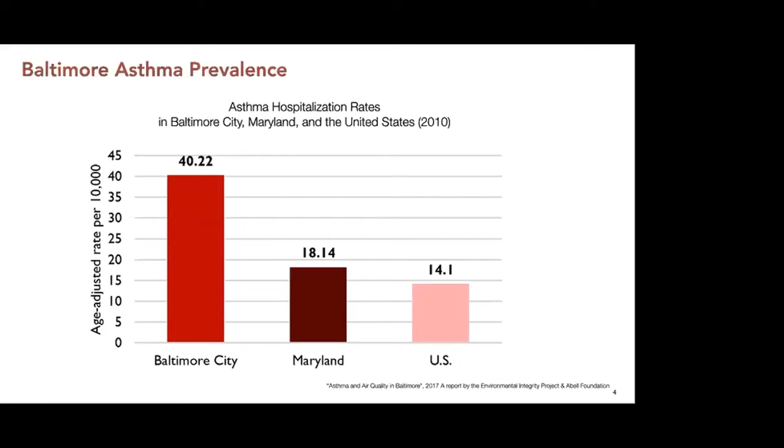It is no wonder that for Baltimoreans involved with affordable housing and community development, the mention of asthma would be attention-grabbing. A study done by the Environmental Integrity Project and Abell Foundation found that Baltimore has 3 times the national rate of asthma hospitalization and twice the rate of the state of Maryland.

The same report had a few spatial analyses that I think is quite informative for us. On the screen on the left, we see the toxic air risk map, taken I believe from the EPA's EJ Screen information system. On the right, we see asthma hospitalization rates, which give you a metric of how bad asthma is in certain neighborhoods.

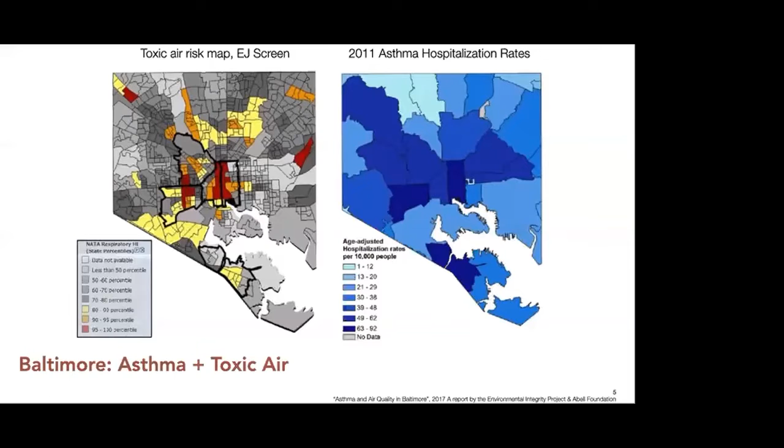There's certainly a correlation between the red areas on the left and the dark blue areas on the right, indicating that high toxic air goes with high asthma rates.

Mapping PM 2.5 particulate matter from traffic shows concentrations also coinciding with asthma hospitalization rates on the right.

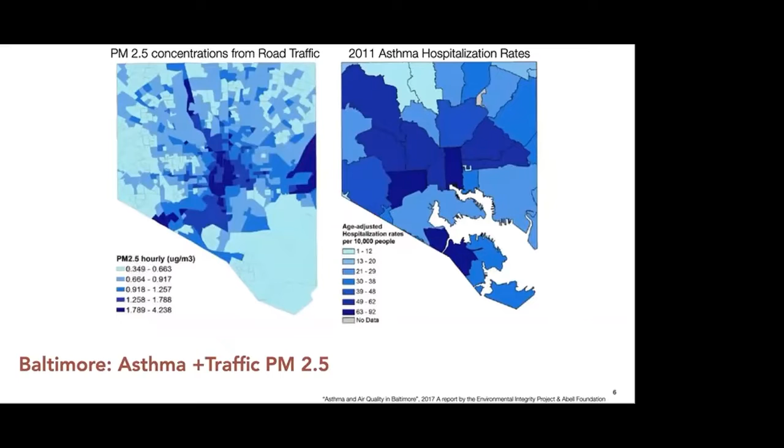In this slide, asthma prevalence is on the left, median income is on the right. Median income was found to have a strong correlation with asthma hospitalization. The low-income communities who have the worst living conditions in the city, and in Baltimore these communities are predominantly African-American, are clearly who suffer the most from asthma. In Baltimore City, the hospitalization rate for asthma was approximately 2.9 times higher for Black residents compared to white residents.

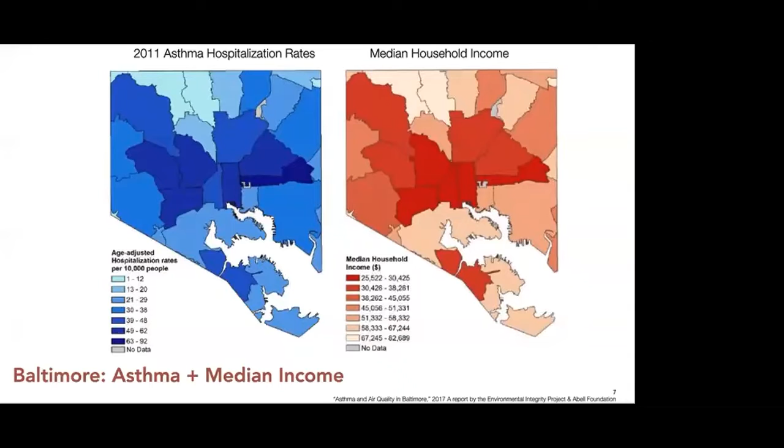So how can passive house design help?

But in order to go beyond anecdote, hunch, and conjecture to evidence and substantiated claim, we need a grounding in research and science, as well as studies of passive house buildings and their health impacts on residents. Has there been any research or investigation that could help substantiate such a claim? What area of health could passive house play a critical role in, and how?

Looking at various studies related to this area of concern, I found a study that compares the indoor air quality of two passive homes in London in 2012 and compared it with non-passive homes nearby. Temperature, humidity, CO2 levels, etc. were measured, as well as particulate matter. A cool part of this study was that resident habits were studied in detail—window opening, clothes drying, taking showers. In the diagram shown, for a month of one of the buildings, the cause of the spikes in humidity and hot water were thus identified very clearly.

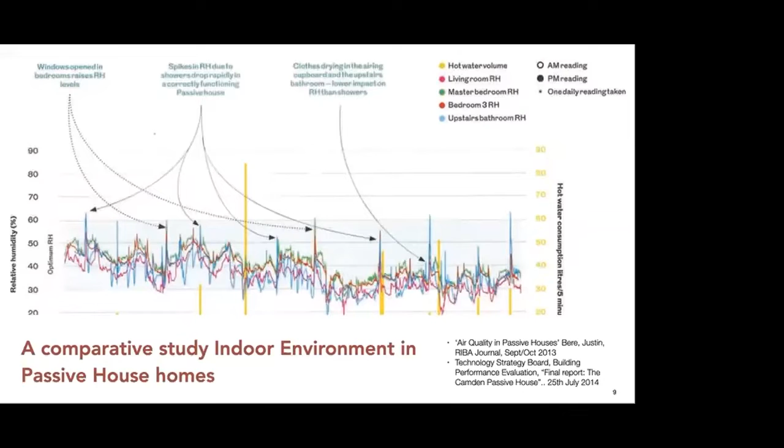Of the few studies of passive house homes and resident well-being, a focus I found was on verifying that a dependency on heat recovery ventilation provided a good, healthy environment. The two studies I found confirmed this using subjective evaluations of the well-being of residents. No studies that I found actually examined the well-being of asthmatic residents in passive homes, interestingly enough.

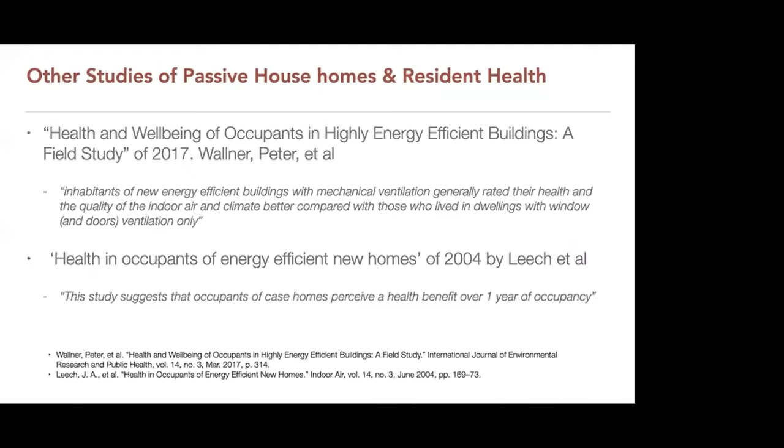Two studies that overtly went about constructing indoor environments to help asthmatic residents came across my research. One we will hear from Tom Phillips is the Breathe Easy project in Seattle. And a few years before that, a study in the UK where homes of asthmatic children were fitted with heat recovery ventilation, where symptoms were then found to be reduced. I hope I have the dates correct there, but in any case, Tom will set me straight in a few minutes.

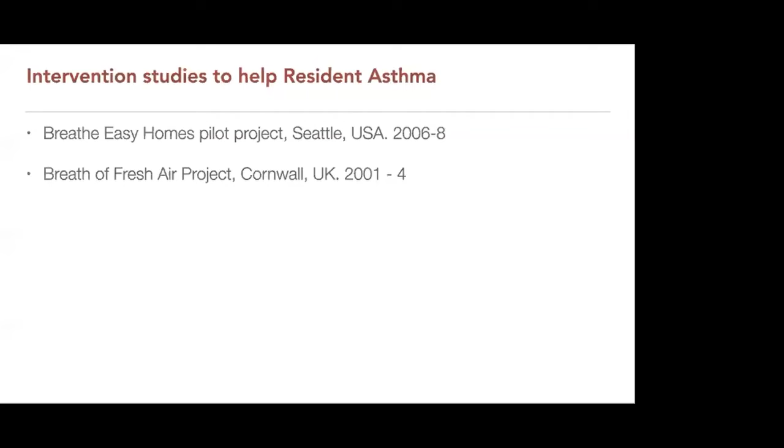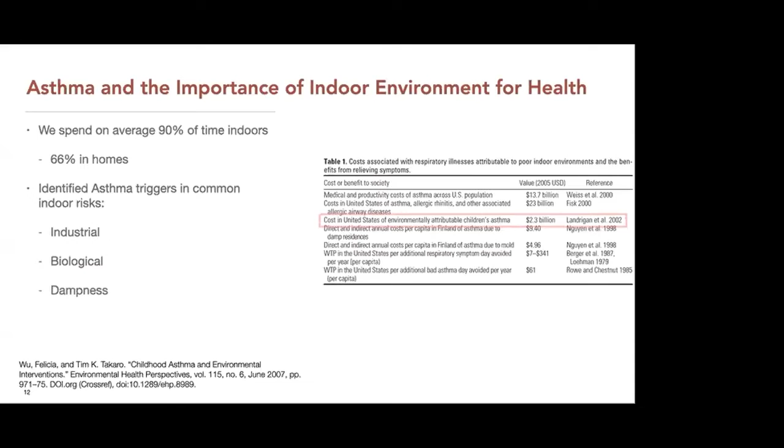There are many studies investigating connections between the environment and asthma in general. In a paper on childhood asthma and environmental interventions, authors Wu and Takaro point out that we spend 90% of our time indoors, 66% of which is at home. In the indoor environment, they identify health-critical contaminants, both biological and industrial, as well as dampness, that can trigger asthma. The cost of care of environmentally attributable child asthma throughout the country stood at an amazing $2.3 billion, I believe in 2005 dollar values, and presumably is much higher today.

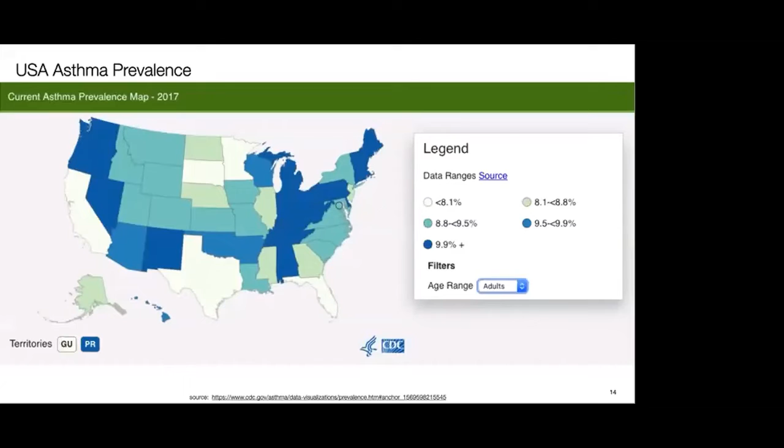So what are the basic facts of asthma that we might need to know? Asthma is a problem with our respiratory function. It's non-communicable, but at the same time it's not curable. The breathing pathways are constricted by reflex or allergic reaction. We have no control over the kinds of smooth muscles wrapping around our breathing airways, and they will contract by reflex and constrict breathing for an asthmatic person. Allergic reactions can also inflame the inner parts of the airways, and a similar constricting action can take place.

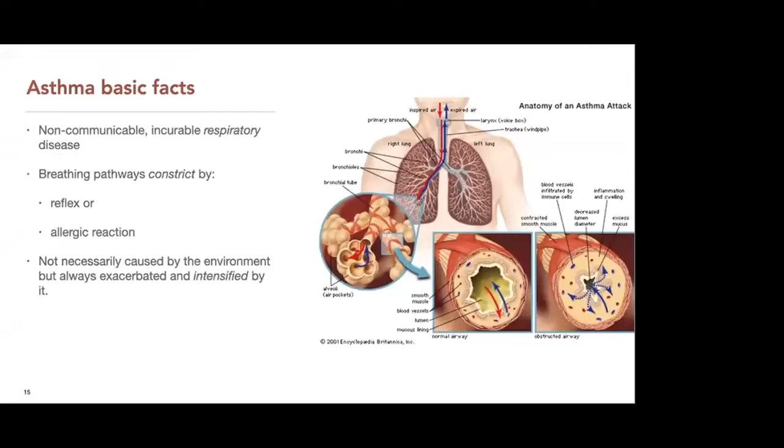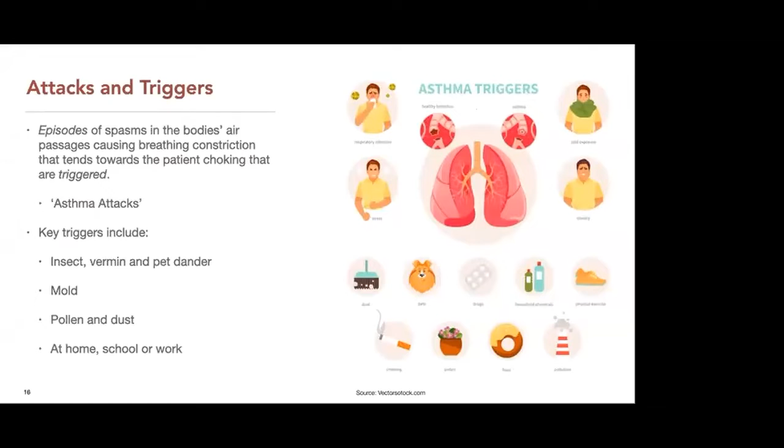Note that bad environments actually do not cause asthma. The environment provides triggers that keep asthma episodes recurring. Triggers to asthma at home are many, as mentioned earlier, of industrial and biological origin, and like cigarette smoke, even introduced by residents themselves. So a wide range of environmental parameters would need to be tracked to evaluate its impact on asthma.

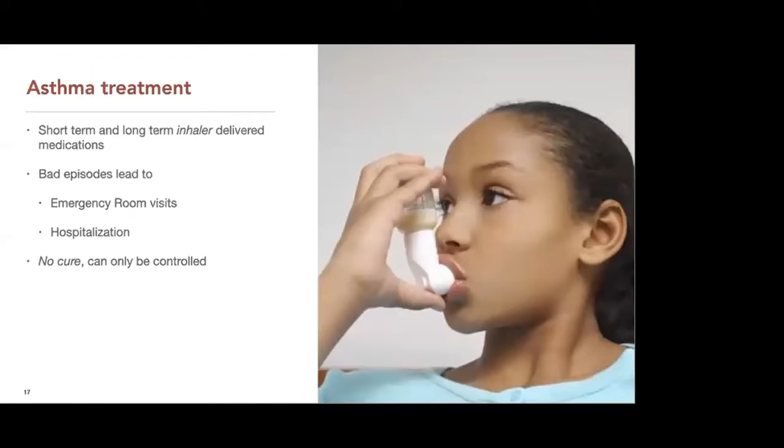Medication basically tries to relax those breathing airways we saw earlier that have contracted and constrict breathing. Severe asthmatics need to carry inhalers. Failing that in time, or overwhelmed by triggers in a bad episode, emergency room visits and hospitalization become inevitable.

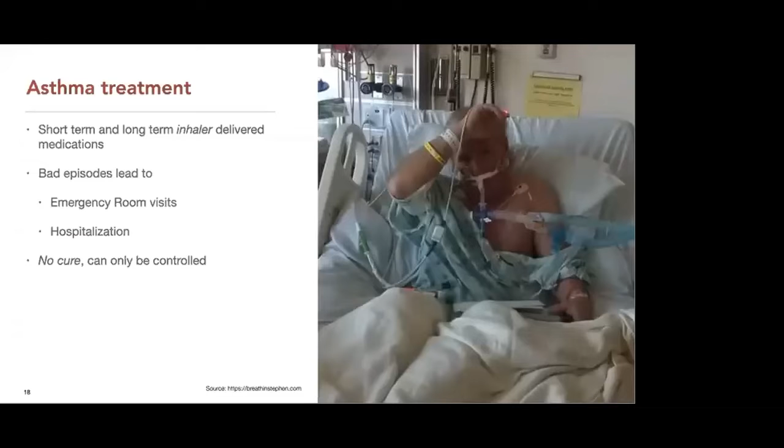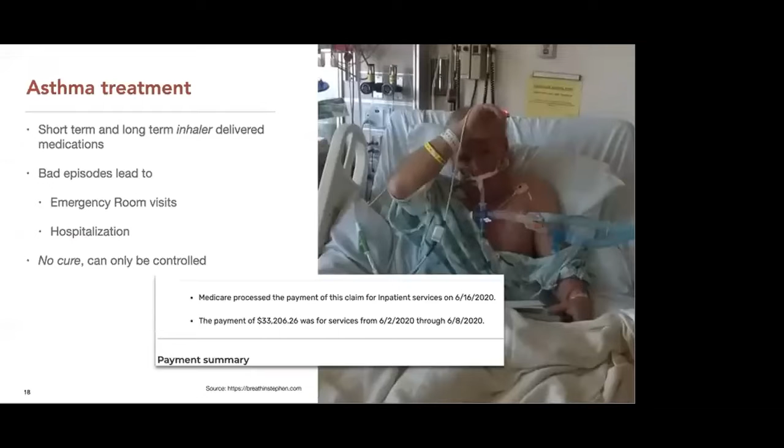Breathing Stephen, whom we see here, was born severely asthmatic, but is actually a marathon runner and keeps a fascinating blog where he posts his medical bills, which happen to be covered by Medicare, but run in the tens of thousands of dollars. Enough, certainly, to probably fit a good part of his house with PHI-certified triple glazed windows.

Looking back at Baltimore to get an idea of the impact of asthma in the city that Passive House might be able to help with. In this diagram, we are seeing in gray the whole city's asthma prevalence over 13 years, and in the two colors are two neighborhoods, Curtis Bay and Brooklyn. You'll see that the city's line is within a fairly narrow range, while the neighborhoods go up and down quite a lot.

Between 2009 and 2010, new control measures were applied to nearby coal-fired power plants that shaved off something like 45,000 tons of sulfur oxide emissions, 10,000 tons of nitrogen oxide emissions, and about 1,000 tons of PM10 emissions. I don't have any numbers for the PM2.5 emissions that would also probably be accompanying these pollutants. As soon as the air pollution was removed, you can see where the dotted lines are—asthma incidents in Curtis Bay and Brooklyn dropped.

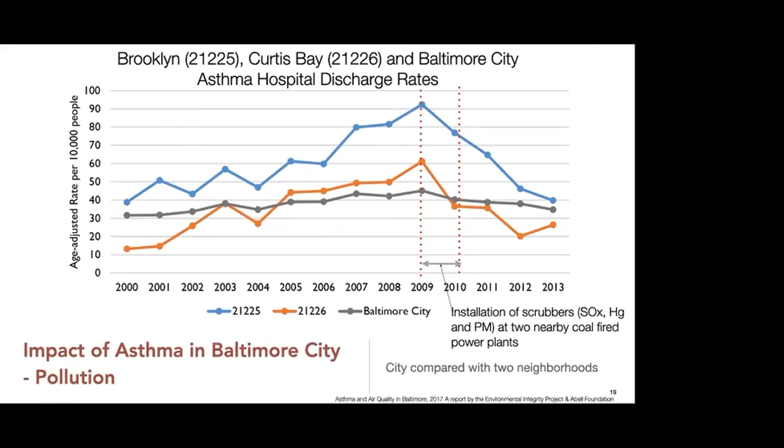These neighborhoods, few homes, if any, would be able to mitigate that kind of air pollution. And even Passive Homes, with their air filtration and balanced ventilation, would be able to deal with some, not necessarily all. We might have to find some new tricks to get Passive House to deal with some of the air pollutants, but we can, because of the mechanical systems that we use.

Okay, so finally, I'd like to take a look at also the impacts in terms of cost. One of the main factors driving high asthma hospitalization and emergency room rates in Baltimore is poverty, linked to many conditions that worsen asthma, such as poor housing conditions and lack of access, limited access to medication.

The city's total bill is a staggering $33 million a year. But the point to remember is this: that even if all the bills are picked up, caregivers will lose work hours, children will lose school days, and these negative impacts are real and critical to understanding the full impact of asthma, and the human suffering, as well as dollar costs, that Passive House might be able to mitigate.

We've seen how important the indoor air environment is in the health impact of Passive House, and I would like to now turn over the presentation to Tom.

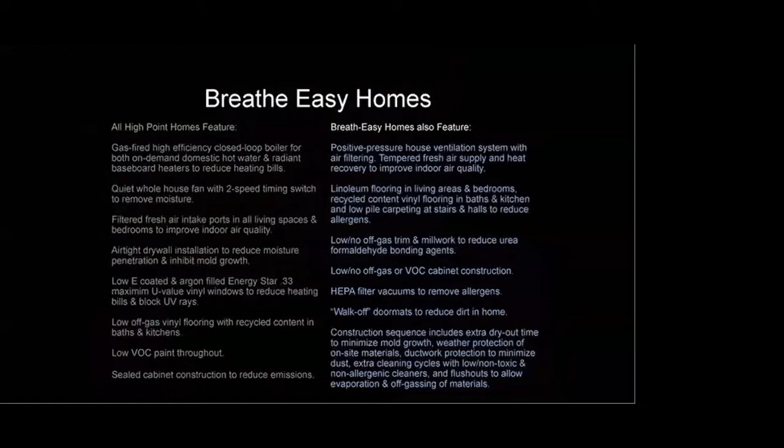So we designed the regular 600 units with a lot of the standard features one put into a green, Energy Star house at the time. This was around 2004. Standard low VOC paint, the kinds of things people are very familiar with.

But with the Breathe Easy houses, of which we were going to build 35, we started to add other features. Positive pressure house ventilation was the most important one. We also added insulation under the slab.

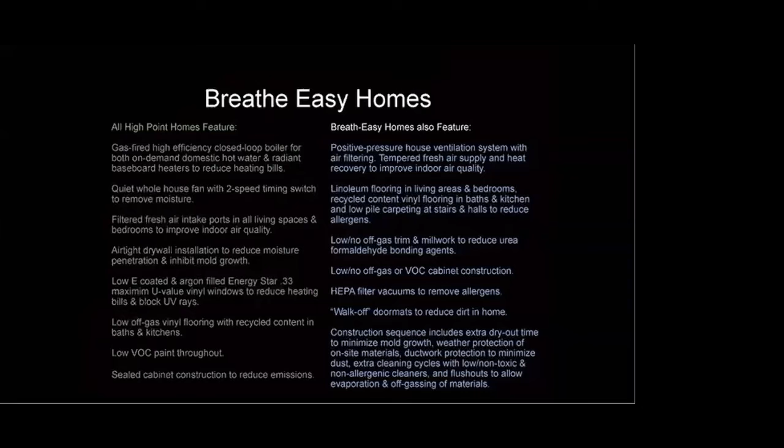We then went about finding the people to live in the units, which was a challenge. We started building the housing, and that was actually quite a positive experience. The construction crews really got the idea of what we were doing. They did not smoke in the house and were very supportive of what we were doing.

The key element we added to the Breathe Easy homes was fresh filtered air ventilation. At the same time, we put in walk-off doormats and gave the families HEPA filter vacuum cleaners. The families had to agree not to smoke in the units and not have furry pets.

So we had doctors working with us and tracking the families, and we went about recruiting families to live in the units. This particular phase was 35 units, and believe it or not, it was a challenge to find them.

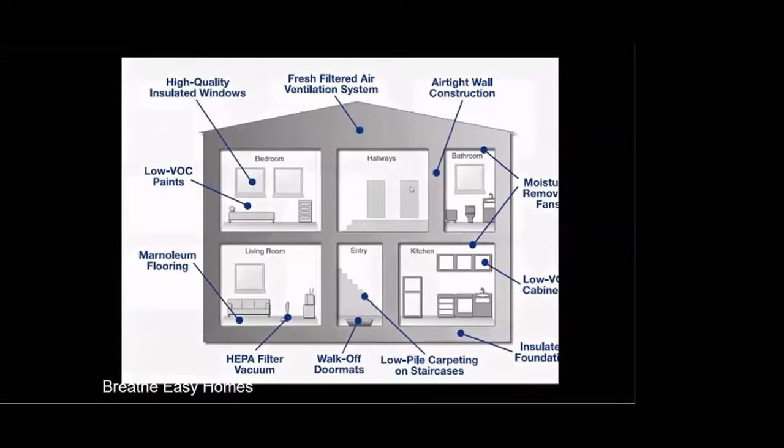Once we found the families, a year before they moved in they took a physical, a month before they moved in they were given another physical, a month after moving in they had another, and then a year after they had moved in they were given a final physical. The results were quite encouraging, and this was all peer-reviewed studies.

In the old house where they had lived previously, the first issue was symptom-free days. Out of a two-week period, there were only 7.6 symptom-free days, less than half the time. In the new home there was a big improvement, to 12.4 symptom-free days.

As we've seen, urgent care visits are frequent for people with asthma. In the old homes, there were more than one per week. In the new home, there were 20.6 urgent care visits for the families over the study period.

One key indicator that got researchers very excited was quality of life: on a scale from 1 to 10, with 10 being best, families went from 5 to 5.8 in the new home, which made everybody very excited. This was roughly a $6,000 upgrade to the house.

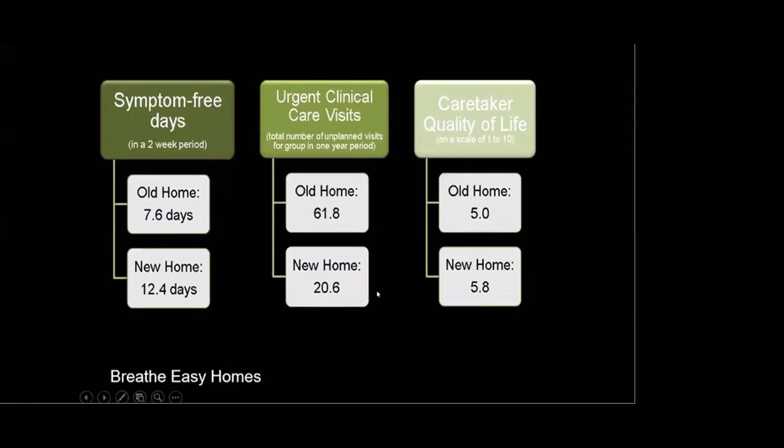So in effect, we've seen some of the numbers, it pays for itself pretty quickly in terms of the cost to society.

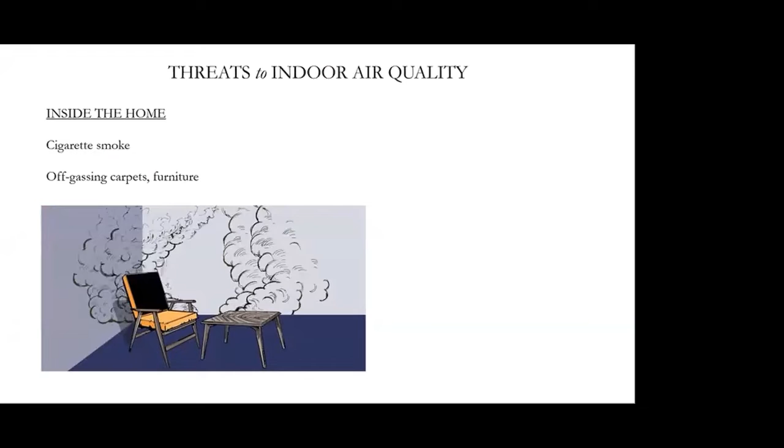Off-gassing of carpets and furniture is another huge issue. Again, not as big as it was a few years ago because there have been regulations in place to limit the amount of formaldehyde that can be off-gassed in materials, but it still makes an awful lot of sense to make sure there's a breathing period when building a new home to allow materials to reduce the amount of off-gassing that's happening.

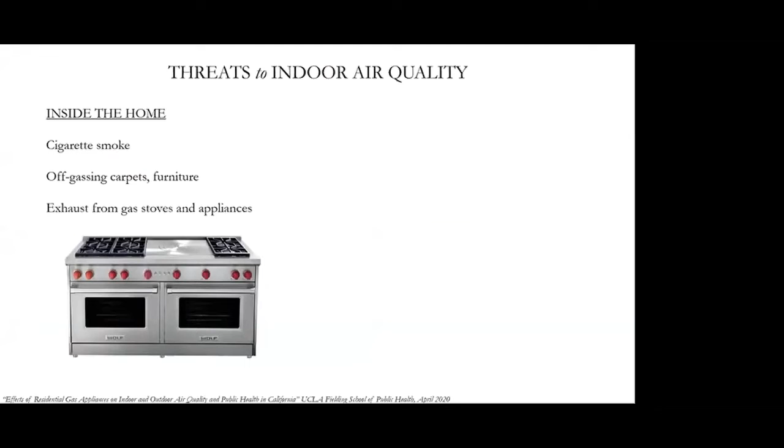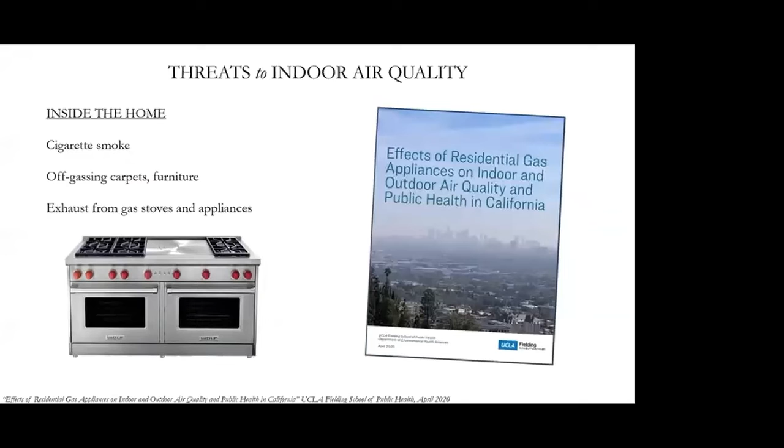The next big one, once we stop smoking, is gas appliances in the home. That big Wolf stove, when running without full ventilation, is basically like living alongside a busy intersection. Leakage of gas can happen from hot water heaters and furnaces and other appliances. There's a few great new studies, including this one from UCLA, about the effects of gas emissions in buildings that I urge you to take a look at.

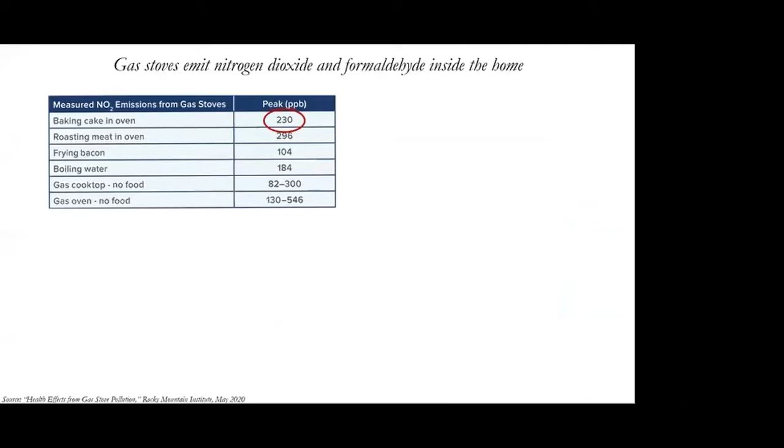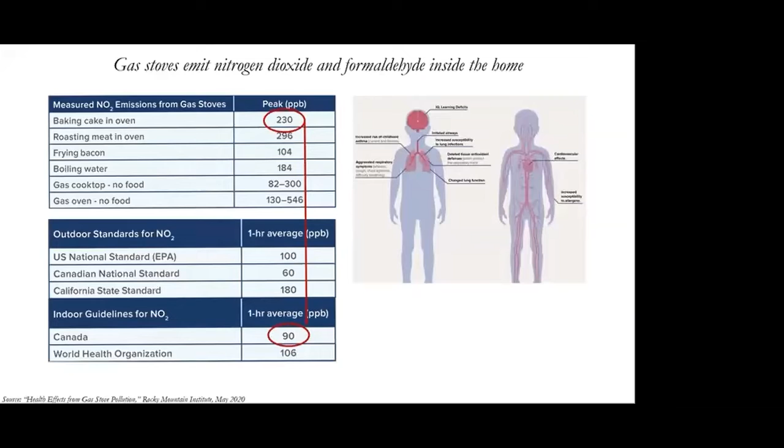Something as simple and seemingly benign and friendly as baking a cake in the oven can create a peak nitrogen dioxide level of 230 parts per billion. Now, to put that number in context, outdoor standards are around 100. There aren't indoor standards in the US, but there are indoor standards in Canada, and that cake is double the advised indoor standard. And things like nitrogen dioxide are particularly damaging to children. They have bigger lungs relative to the size of their bodies, and their brains and other organs are still developing. This chart and these numbers come from a great report by Rocky Mountain Institute, also looking at the health effects from fossil gas stoves in homes.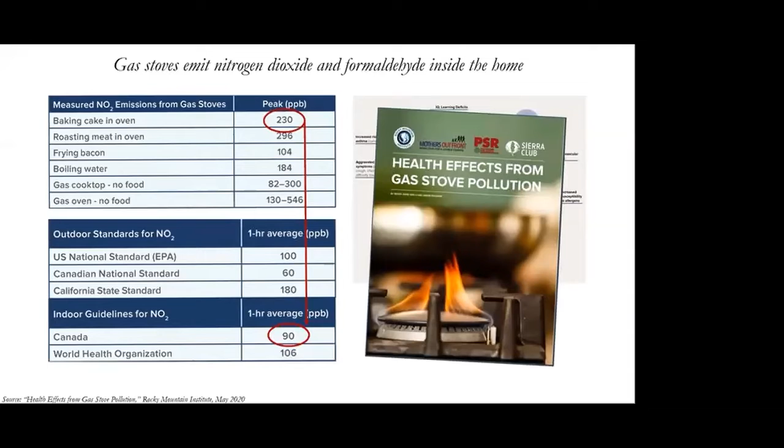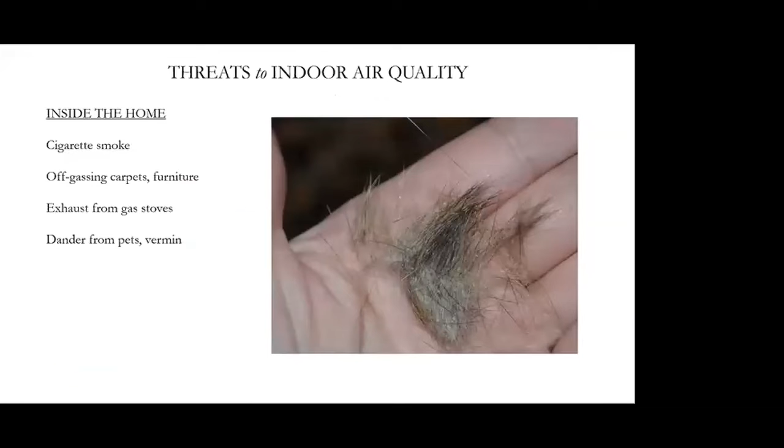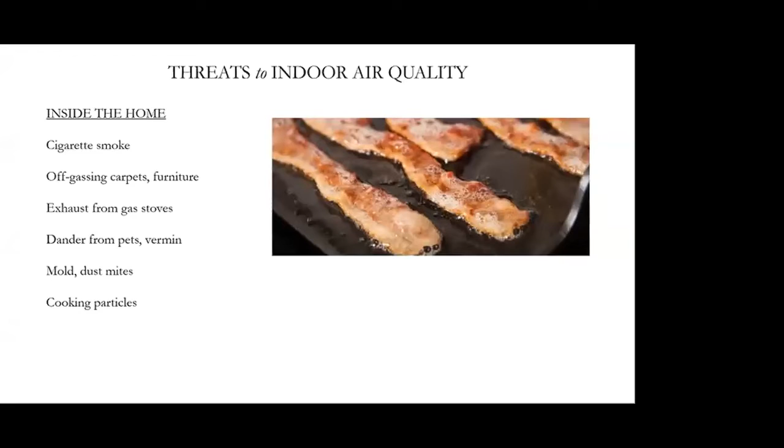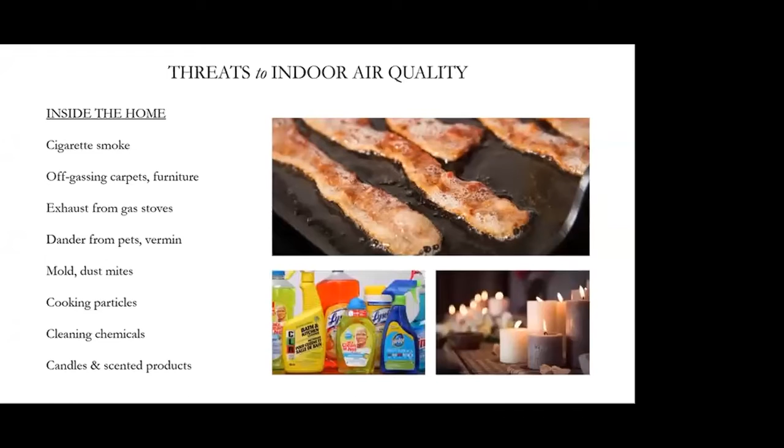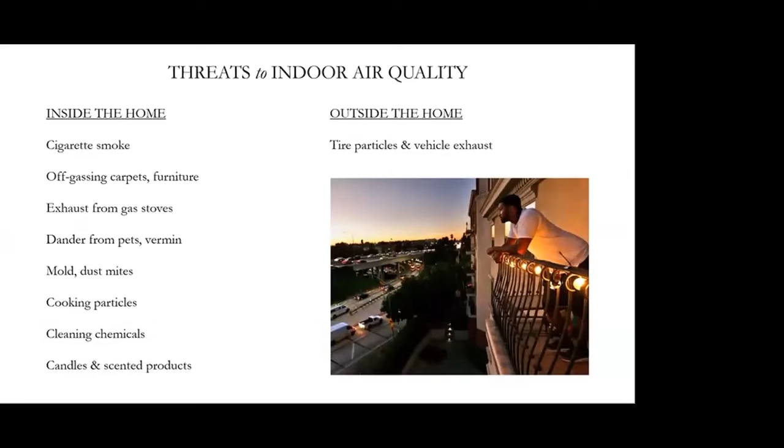Now, as we mentioned, there are also threats outside the home. Tire particles and vehicle exhaust are huge. This really showed up clearly on those maps Timmy showed at the beginning, where you could see the increase in PM 2.5 right along the freeways and main arterial roads. Unfortunately, we build an awful lot of affordable housing, rental housing on arterials, therefore putting this housing in the worst air quality that exists in some urban regions.

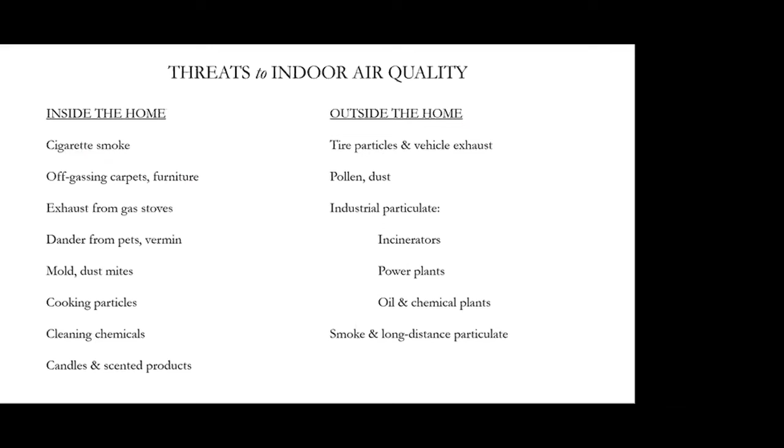Pollen and dust, particularly tough if there are allergies or asthma. And of course, industrial particulate, and Timmy's slides showed these as well: incinerators, power plants, oil and chemical plants, some factories. And then finally, as climate change introduces really large wildfires in some parts of the world, we're seeing smoke and long distance particulate pollution.

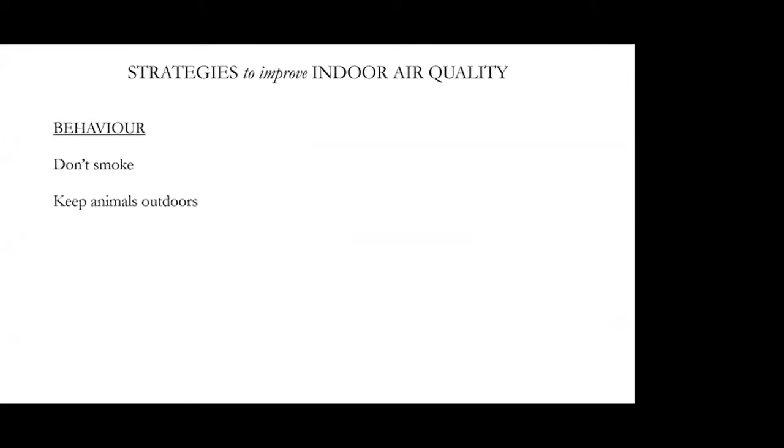So what strategies might we pursue to improve the situations? We're going to look at two things: source control, that's mostly within the occupant hands, and high performance ventilation, and some other building science strategies that are more in the building. Let's look at the behavior first quickly, because most of these are kind of obvious. Well, best thing you can do for indoor air quality is don't smoke, or at least don't smoke indoors. Keeping animals, pets outdoors can be really healthy, especially if there's asthma or allergies or other sensitivities in the household.

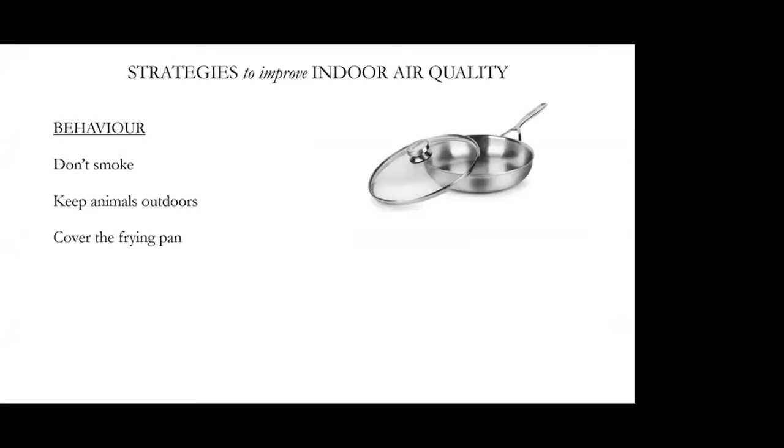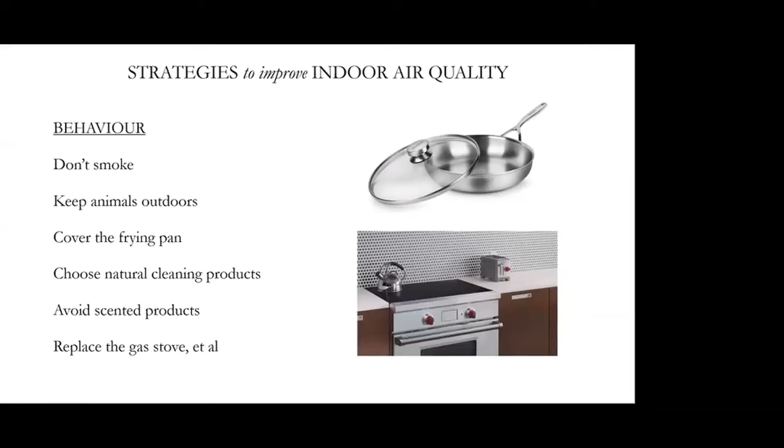From a cooking perspective, cover the frying pan. It's that simple. If you cover the frying pan, the vast majority of the time, you will reduce cooking emissions pretty significantly. Choose natural cleaning products, avoid scented products, and if you can afford to do so, replace the gas stove or replace the open flame gas water heater. There are induction stoves that are fantastic, and most of the kind of high-end chefs and other cooking professionals are finding induction is actually much easier to cook on, much easier to control than gas cooking.

Building performance-wise, there are also clear steps, and you saw some of these on the Seattle examples, but I want to just take a minute and talk about why they work. So air tightness is one of the huge factors that can make a home healthier. You have a strong air barrier that prevents the exchange of outdoor pollutants and indoor pollutants, and therefore allows you to ventilate and clean out some of the indoor pollutants.

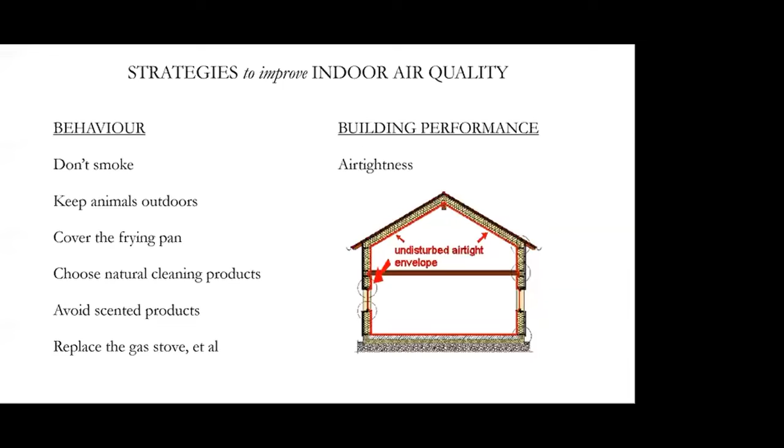But there's another reason air tightness matters. Most of you who've taken apart a home or renovated a wall or something have seen this, the sort of black marks around the edge where your insulation comes up against studs, and if you pull it back, you may very well likely see mold on the outside or the inside of the sheathing on the outside of that wall. What's happening here is an inadvertent exchange of air. It's air leakage, and it's really important to understand the effect this has on air quality.

So think of the house as exhaling. Warm, moist air in the house relative to outdoors flows into the wall when the house is pressurized. And the house could be pressurized simply because it's a little warmer than the outside air because it's somewhat closed in, especially in wintertime. So you're pushing warm, wet air into the wall. It hits the colder sheathing on the outside. That water condenses and leads to mold. And that's exactly what's happened here: air has slipped along those edges of those studs because there's nothing to stop it from doing so and condensed along the outside sheathing.

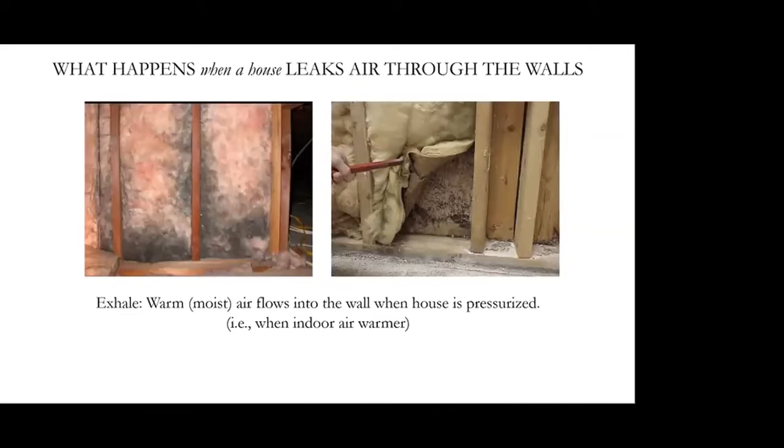Now, you decide, it's a little moist inside. I'm going to turn on the bathroom fan. I'm going to turn on the kitchen fan. Or maybe I'm just going to run a dryer, which is effectively a big fan. What you've now done is start depressurizing the house and pulling air back into the home through the same cracks you pushed it out of the home when the house was pressurized. This means your fresh air, the air you're breathing, is coming through the mold you created when you were depositing moisture there in the other condition.

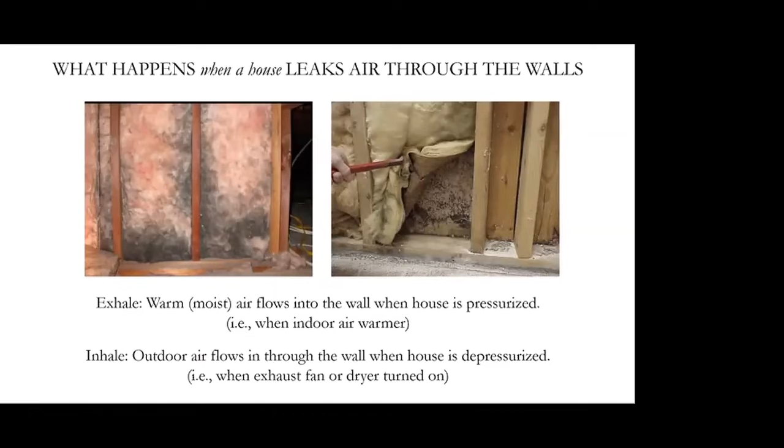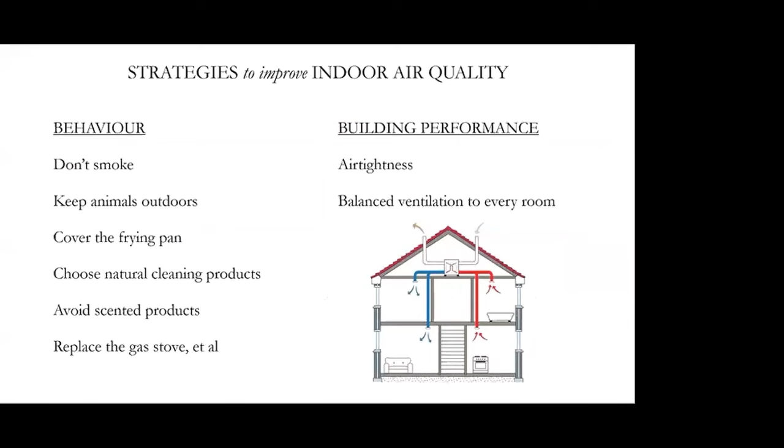And this is the key piece about air tightness. The air you breathe enters your house here. And this is what we want to get away from through these other strategies. So, number one, a really airtight enclosure. Number two, balanced ventilation to every room. If you simply take the pressure off, you're not pushing moisture into the wall and pulling it out because you have another path, a planned path of air coming into the house and air going out of the house at the exact same rate. You literally don't create that pressure through the walls to the same degree. That equal supply and exhaust does not force air through the assemblies.

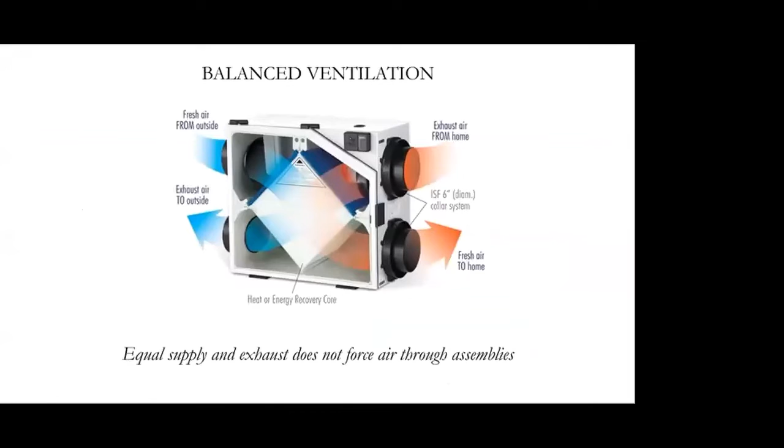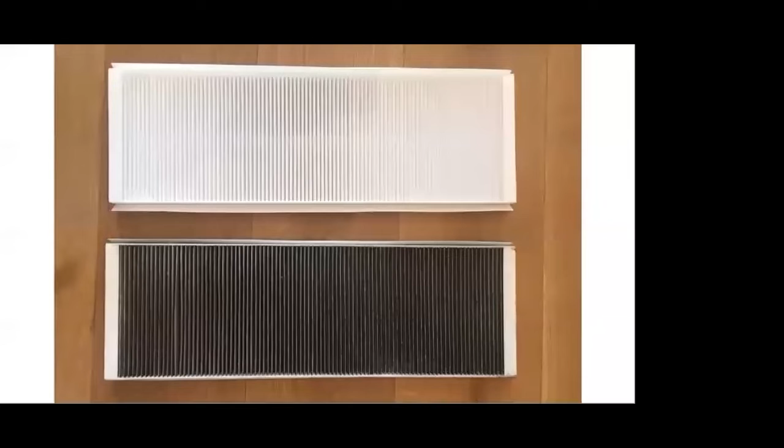You've got air tightness, you have balanced ventilation in every room. Now, of course, you want to filter that incoming air. Again, we talked about the skies over Vancouver during the last smoke event, but you could have the same sort of thing happening if you happen to live next to an arterial road with less visible but higher particulate all the time. This is a new filter and a replacement filter after just 1 week in one of those smoke events recently. We also see the need to change filters on ventilation devices much more often when people live near arterial roads or some other form of localized pollution.

The next step that's really important, and again, Tom mentioned they put some insulation under the slab and other pieces. What they were doing is eliminating thermal bridges, because where that thermal bridge is, and many of us have lived in homes with single pane aluminum windows like this, that's the coldest spot. So that's where the air condenses. Where the air condenses and continually gets wet, it leads to mold. Many of us have lived with this. The thermal bridging is a mold factory.

The window is inconvenient because you see it, but what happens in the wall, under the slab, in the attic, around mechanical penetrations can be more dangerous because you don't see it. The exact same phenomenon is happening out of sight. And of course, if it gets cold enough, the thermal bridging can turn to ice.

Finally, we want to manage humidity. We produce humidity in every home normally. You take a shower, you boil some water for pasta, whatever you might do. And it's important to remember humidity is something we're looking for a Goldilocks condition. We're not looking to overdry the house because that can lead to health effects, nor do we want a very, very humid environment inside because that can lead to health effects.

We're looking for something in that midpoint range and designing a ventilation system that considers the humidity of the outside air, which of course is going to be much higher if you're in a place with hot, humid summers, much lower if you're in a dry desert environment or up in the Rockies or something like that. So understanding the climate you're building in and designing ventilation to produce the right humidity is a key piece.

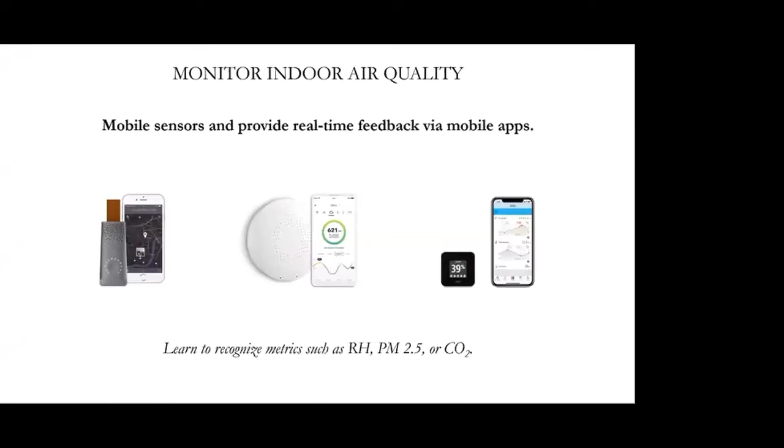And then finally, it's important we start to monitor these effects. We really haven't monitored indoor air quality very much anywhere, but there's a new squad of mobile sensors that provide real-time feedback via mobile apps. And using these, one can learn to recognize important metrics such as relative humidity, particulate matter at various sizes such as PM2.5, or CO2. It's worth noting that many other nations are well ahead of the US and Canada in terms of being aware of PM2.5 and CO2.

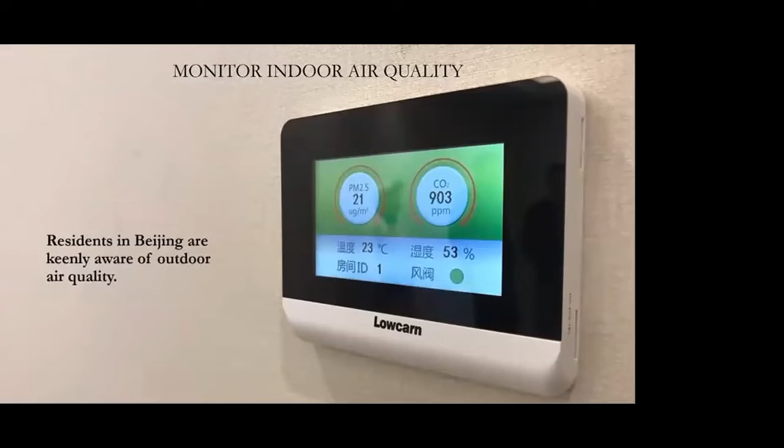This is the default display on a thermostat in a new apartment outside Beijing. And this is very typical in China and increasingly so in Europe, that customers are demanding an awareness of these indoor air quality metrics inside their house.

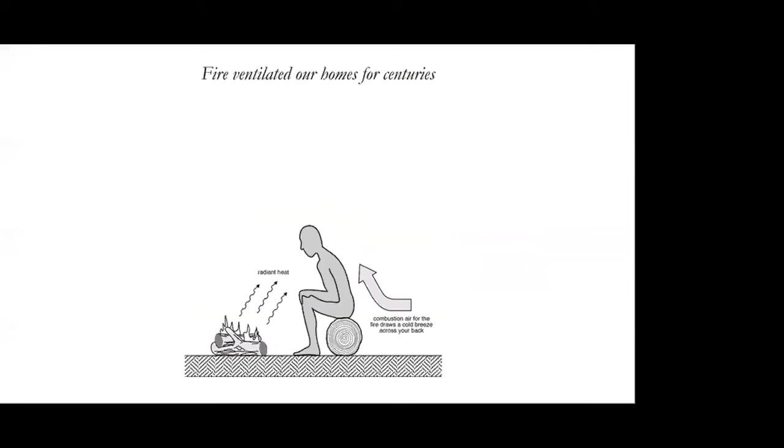So just to recap quickly, once upon a time, fire ventilated our homes. We started building, moved from outside to inside. We started putting our fire in boxes with exhaust, chimneys. And what happened was we created this pathway. And as long as our homes were still really leaky, that combustion air came into the home and the fire was the ventilation. The fire was pulling air through our homes, through big cracks under doors and around windows and pieces like that.

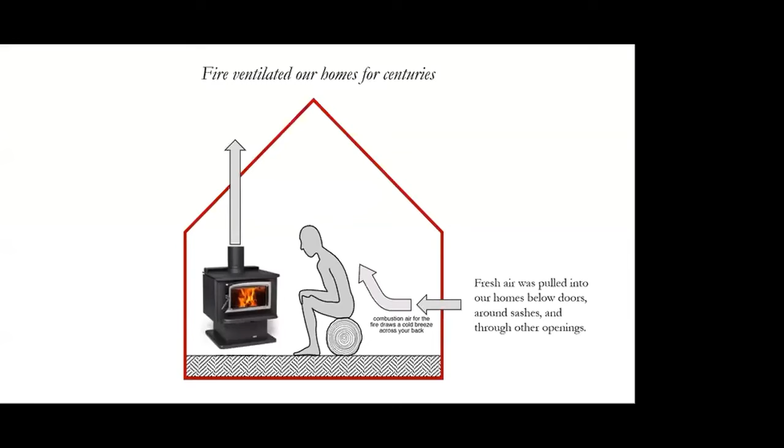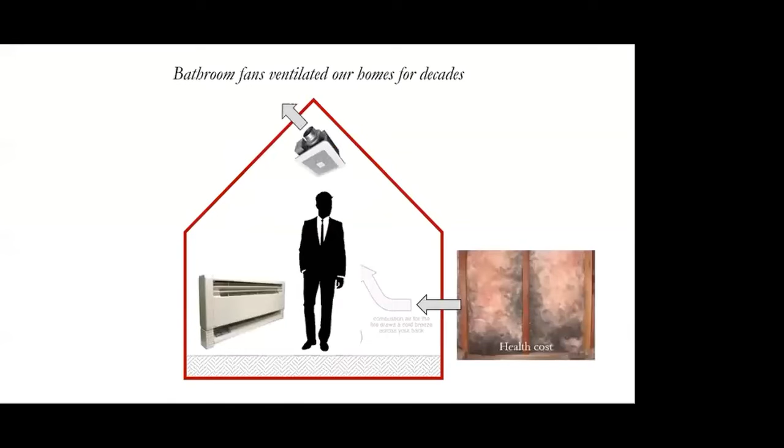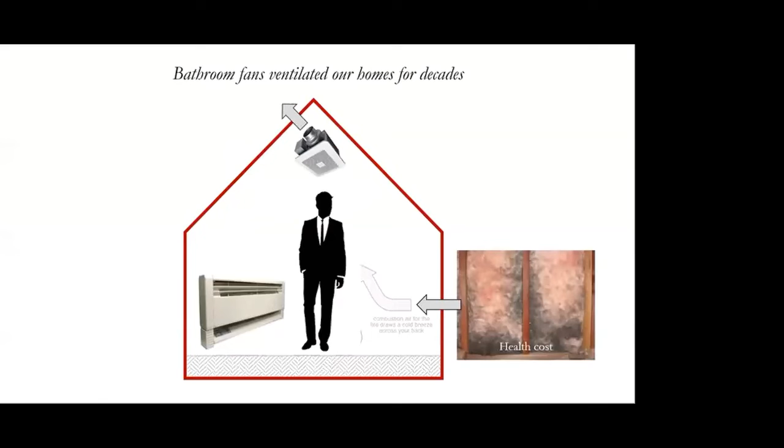As we started making our homes more airtight and started replacing the fire with radiators and other heating devices, we started putting in things like bathroom fans and kitchen fans. And that led to pulling air through the walls in so many ways. And probably there's a correlation between this move towards kind of mid-century assemblies and mid-century construction design and the rise in the rate of asthma and other respiratory illnesses.

And what we're trying to move to now is more insulation, perfect air tightness, and a heat recovery ventilator or energy recovery ventilator where the air comes in on purpose right to the ventilator and then out through the ventilator. And so we get rid of all that other equipment and create a much healthier home. So to pull this together, we have these strategies that can improve indoor air quality. We can adopt the behavioral strategies today, big ones: don't smoke, cover the frying pan.

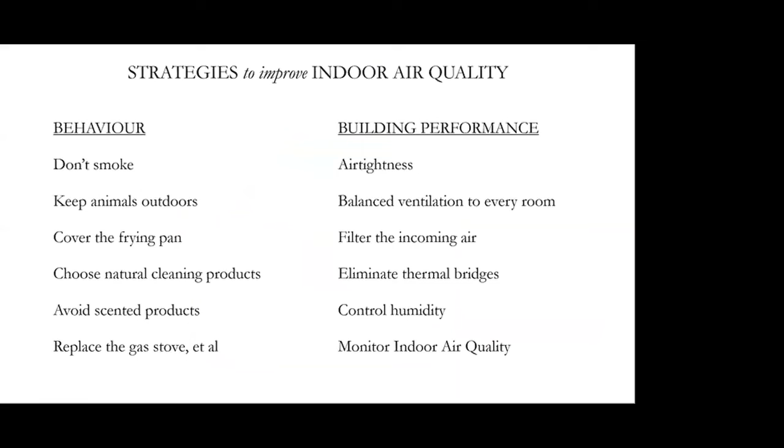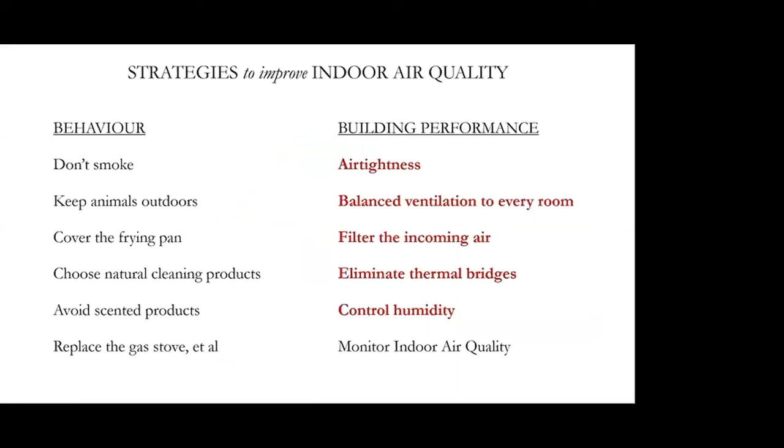Of the building performance strategies we've listed and looked at, and you saw many of these in effect in the Breathe Easy Homes in Seattle, these are part of the Passive House standard. If you build a Passive House either to the international standard or the US standard or to the EnerPHit renovation standard, this is built into the system and there is quality control around these metrics. And so Passive House, in a sense, for many of us, becomes the shorthand for good indoor air quality. Rather than depending on a field of professionals to get everything just right, you've got a certification standard that's going to make sure you get these pieces right.

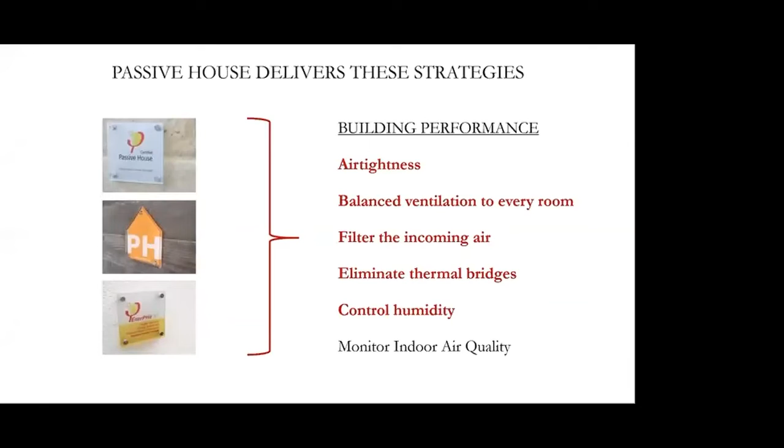I hope we all gain some insights into the way superior indoor air quality can lead Passive House down the road of the Breathe Easy Homes of Seattle and dramatically improve the quality of life of asthma residents as well as others. In fact, Monty pointed out the very important point that Passive House is halfway there already. We're kind of doing some of this stuff.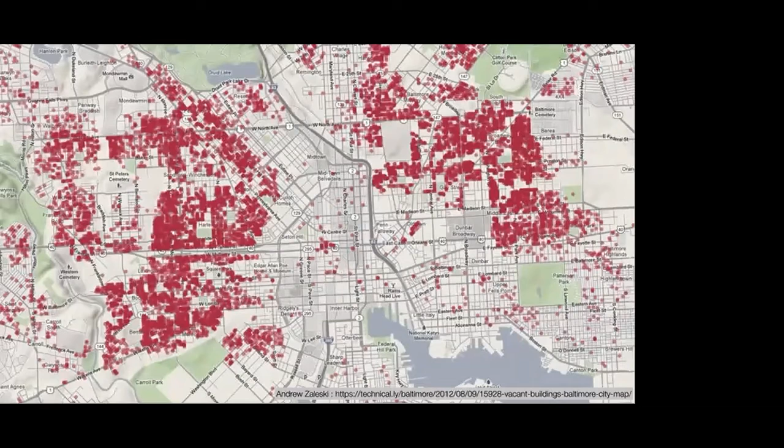Now, if we were to put costs to these projects, about 200 to 300K dollars per dwelling unit, a 50% Baltimore median income household may only be able to secure a part of that, like 150K maximum is what I sort of guesstimated, leaving a funding gap of about 100 to 150K per unit.

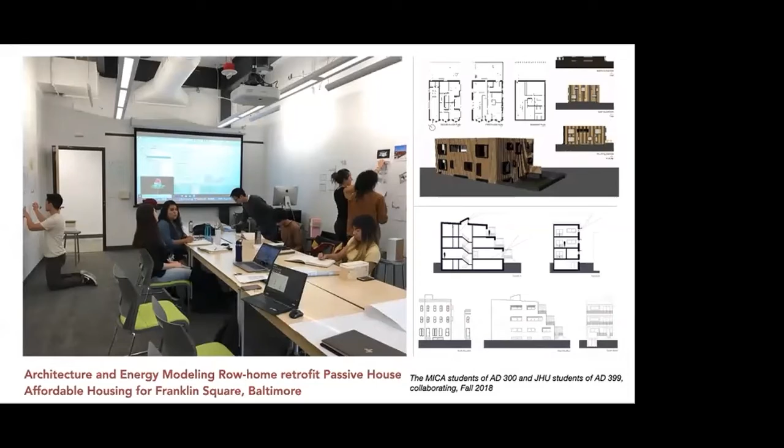But Baltimore's asthma bill is $33 million, right? It could alone equal the financing of 220 homes. So that's to say that if a proven, fact-based link between health and passive house can be established, there can be funding streams available that are not available at the moment that may support our cause.

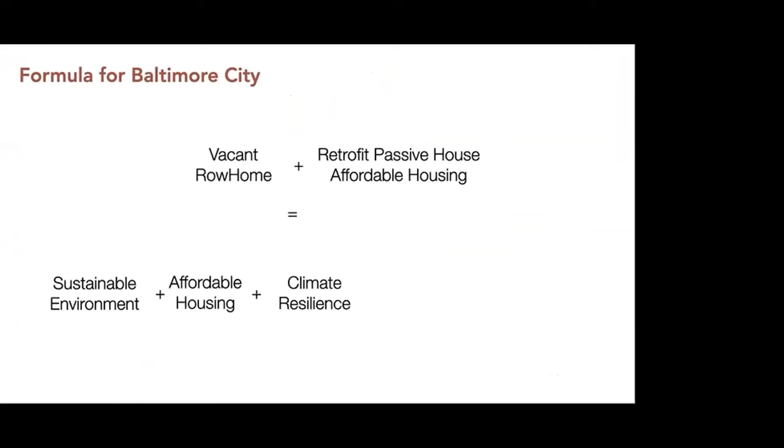As a last note, this is my kind of formula for Baltimore at the moment. Vacant homes, we've got loads of them. We are developing skills in retrofit passive house affordable housing. And we can claim that these will result in a sustainable environment, housing that's affordable for the community, climate resilience, and generally an improved quality of life.

What I would like to do is add to this list of claims, in a substantiated way, that improved public health is one of the outcomes, and that indeed passive house could be seen as part of a public health strategy.